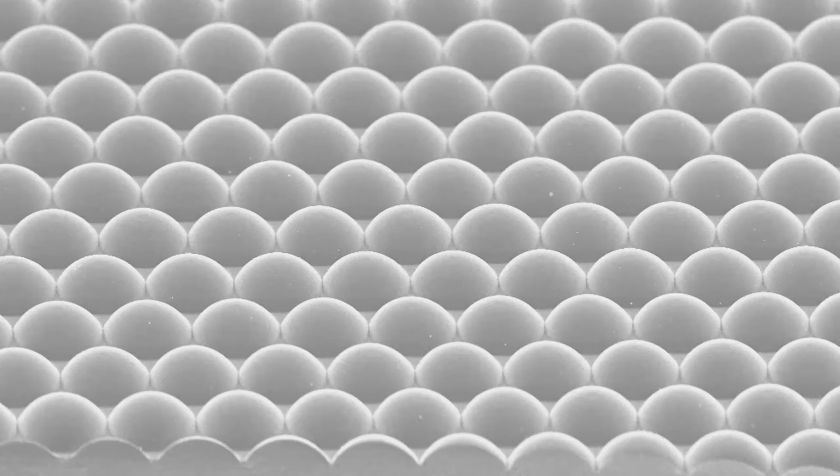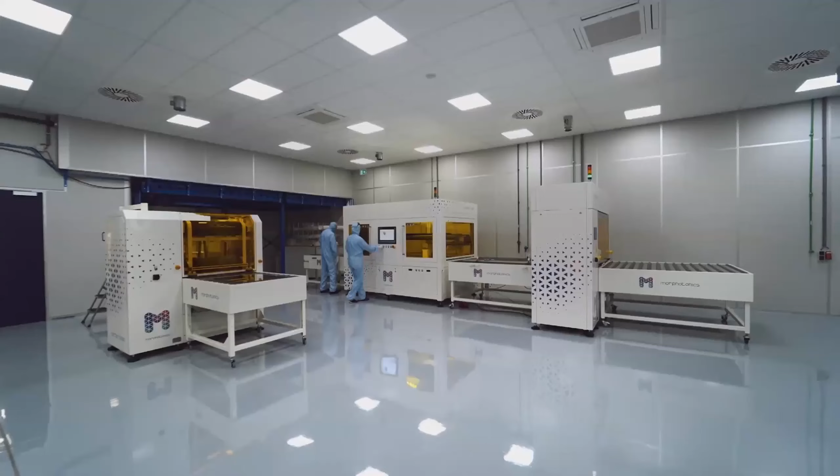The ability to create optical shapes in any form you want, completely miniaturized for perfect integration. Opening up new opportunities for security and branding, optical communications, consumer electronics, and more. And now imagine that this can be done with equal or even better specifications than conventional systems, and at lower costs. This is why PHABULOuS has opened up the one-stop shop in freeform micro-optics, making this technology now easily accessible to everyone who wants to implement it, providing a full supply chain of world-class freeform micro-optics specialists.

We can take you from design to prototyping and into pilot production for the full product life cycle, including design, modeling, origination, tooling, and manufacturing services. Some have already paved the way by integrating freeform micro-optics into their product portfolio. Are you ready to take the next step in your product development? Make it fabulous, and contact the one-stop shop for freeform micro-optics at info@fabulous.eu. We are fabulous.

Good afternoon, everyone. I'm Jeremy Picot-Clement, Technology Manager at EPIC, and I'm really pleased to moderate this fabulous workshop today on freeform micro-optics for lighting application. We'll talk and learn about freeform micro-optics technologies through highly relevant speakers today, in two different sessions: the first focuses on design and fabrication, and the second will be on application.

The aim of this workshop is for you as participants to get the maximum information on PHABULOuS, the European pilot line for the manufacturing of freeform micro-optical components, and also get answers. That's why I warmly invite you to ask any question you have after each presentation. We also have Jessica Van Eck, Managing Director of PHABULOuS among us, so she will be pleased to provide you all the details you need regarding the PHABULOuS project.

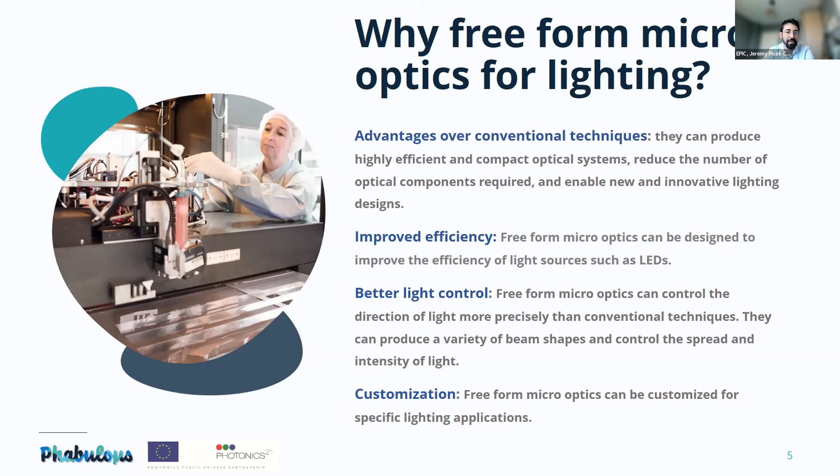It provides better light control by giving the possibility to control the direction of light more precisely than conventional techniques. They can produce a variety of beam shapes and control the spread and intensity of light. Last but not least, customization: freeform micro-optics can be customized for specific lighting applications. This customization is important since it's one of the strengths of European competitiveness in an industrial world where mass manufacturing is dominated by Asia.

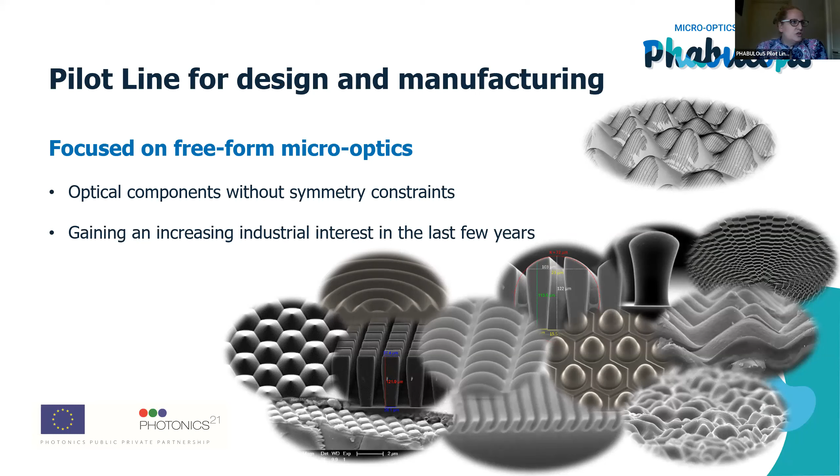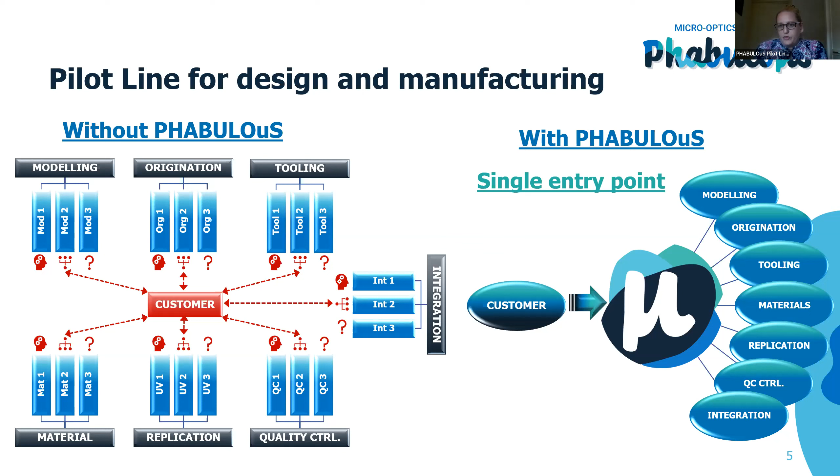We have one NDA covering all these members, and we make one single contract for all the services. So with this, we have all these different services that we can offer. As I mentioned, we have some special design tools also developed within PHABULOuS, really aimed at design for manufacturing, so that we know any design or prototype we make can be produced in large volumes.

We have, I think, at least 7 or 8 origination technologies available. We have partners that can do the tooling, making the tools for the replication. We have partners that can do all material tweaking, and we have a lot of metrology inside PHABULOuS, all aimed at the replication and the integration.

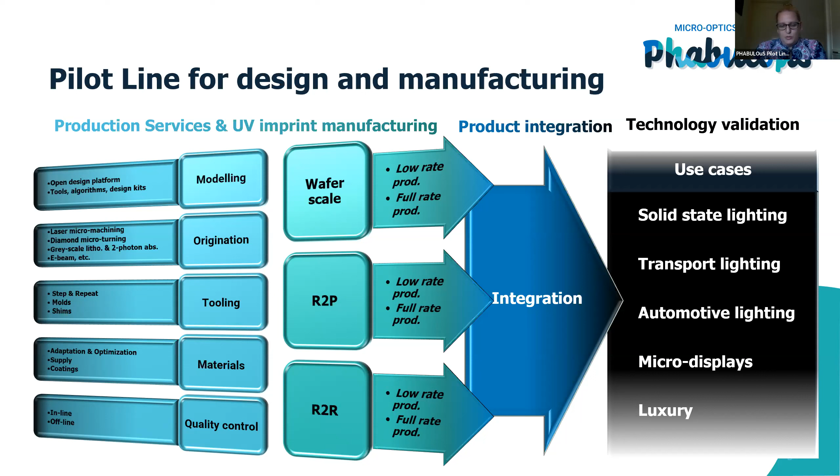We started the project already with a few companies looking to implement freeform micro-optics. You see here the use cases: solid state lighting, transportation lighting, automotive lighting, micro displays and luxury. I'll take you through them really, really short, because some of them you will also be hearing from today. For solid state lighting, we've been working with Zumtobel.

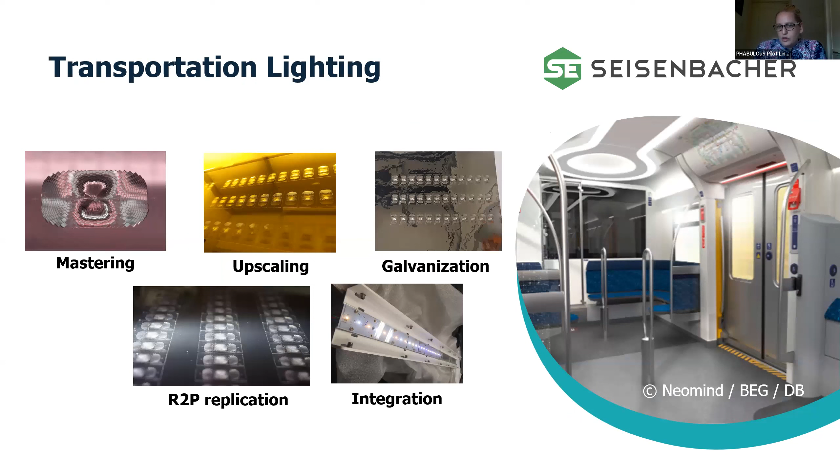You can see here a little bit of the mastering application. For transport lighting, we have been working with Seisenbacher, and you see here different phases that we have been able to do within PHABULOuS. With Hella, we've been working on automotive lighting applications, and you see here some of the things we've done.

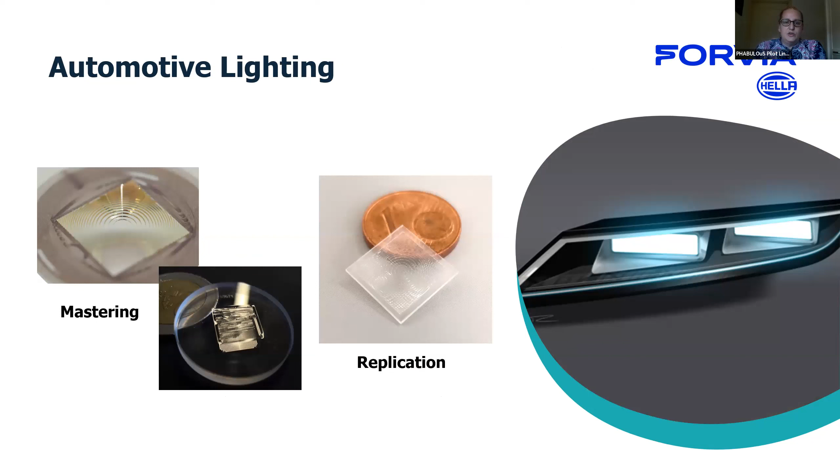And you see here a nice light box using a freeform micro-optical structure. And on the left top, you see also this tool that we've made to create these kinds of structures. So all of this is something that we've already done. But of course, this is just one little glimpse of all the possible applications for freeform micro-optics.

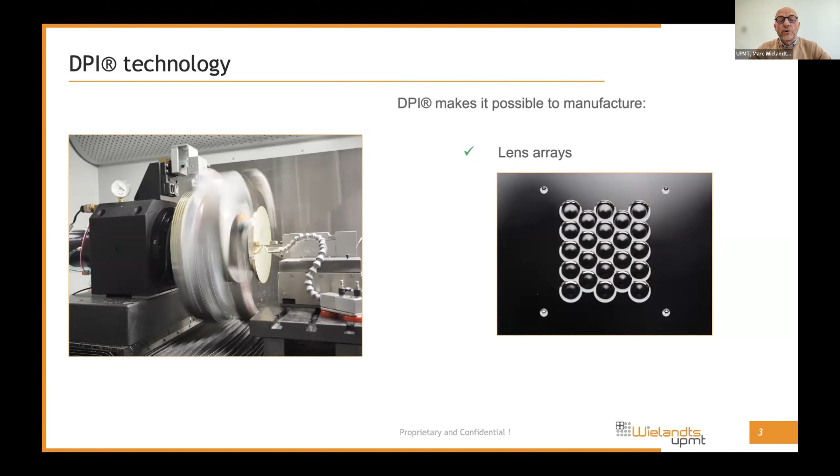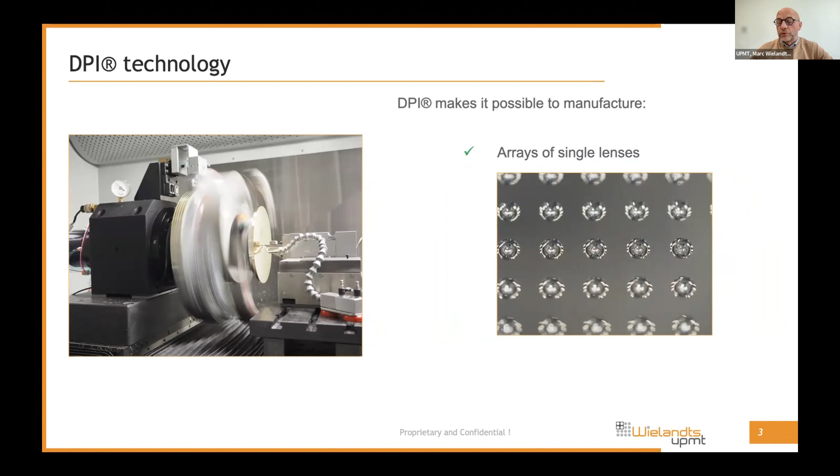Of course, we cannot only make lens arrays, but also arrays of single lenses, which is also a nice feature for mass production of such lenses.

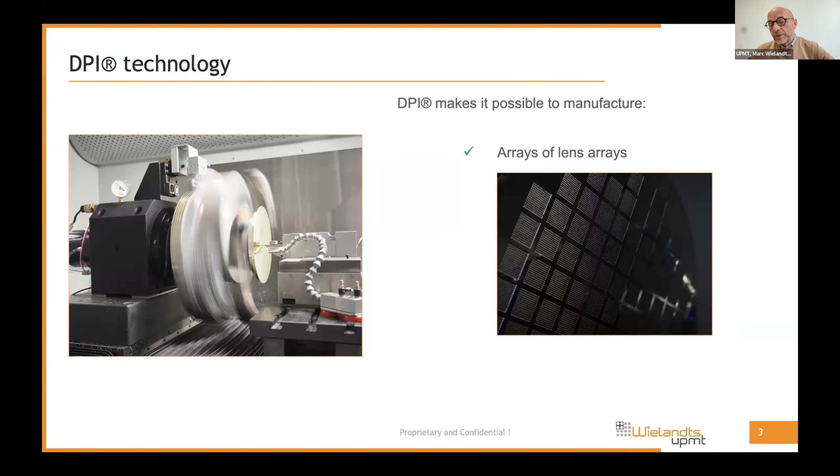Finally, what we do is provide 8-inch masters that are fully populated. In this image, you see a number of MLA structures machined with this technology. There are about 10 or 20,000 lenses on this master, and you will see a little bit of the accuracy of this.

The capability of this is to machine any surface that can be machined by turning, any lens surface, as an array. I'm not going into all the details here, but you have accuracies similar to what you can have in camera systems.

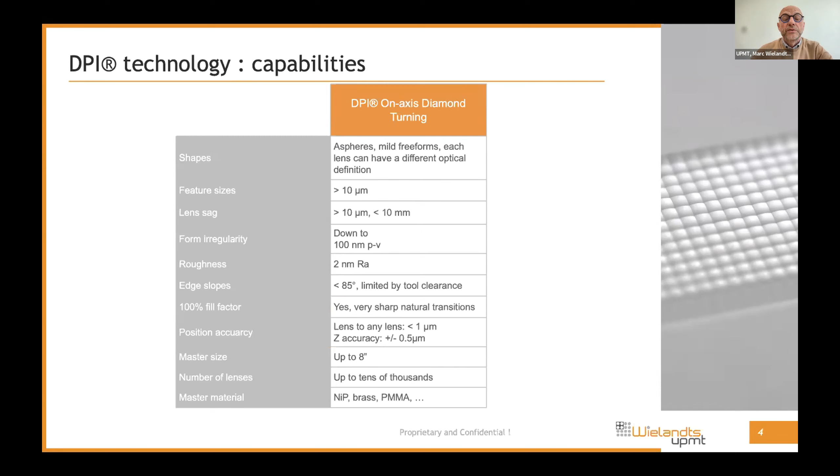What are the applications? Lighting, of course, consumer electronics, automotive lighting, and one of the examples that is given very often is the BMW carpet.

Healthcare, small lenses here can be produced in mass with this technology. AR, VR, automotive headlights - all these processes typically use these kinds of masters.

As an example, you see here a free-form surface of an MLA where all the lenses are different. This was for a VR application, and you see that the form irregularity of every surface can be 300 nanometers PV, so very low, with very low roughness. I think it's the only technology to do that.

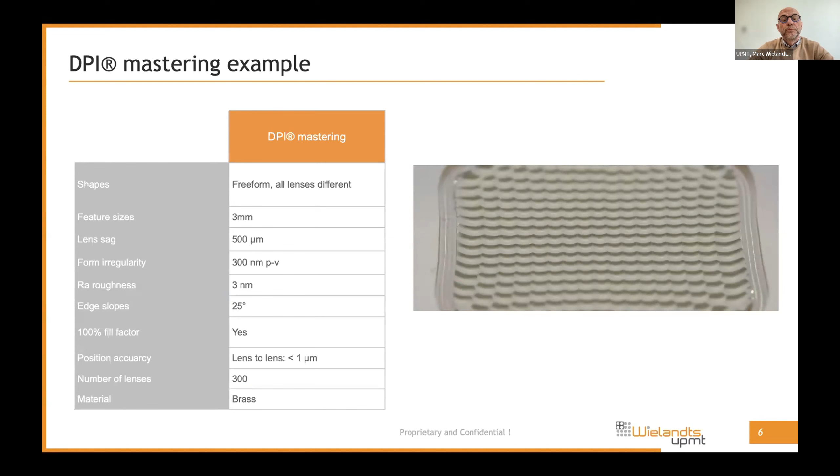Again, the image of the complete populated master of 200 millimeter.

We have been developing this technology to, let's say, the complete accuracy requirements that our customers ask, which are not only for a lens, but also for the array, also related to the position accuracy. They want that every lens on an 8-inch master is positioned at sub-micron accuracy, which with this technology can be done. So lens-to-lens accuracies below a micron on this surface can be achieved.

So we think this is now a ready technology for mass production, which allows us, in a deterministic way, to rapidly produce such masters in a very efficient way.

So we are waiting, of course, for challenging designs that we can do - freeforms, why not, non-freeforms also are welcome. I think that I have consumed almost all my time.

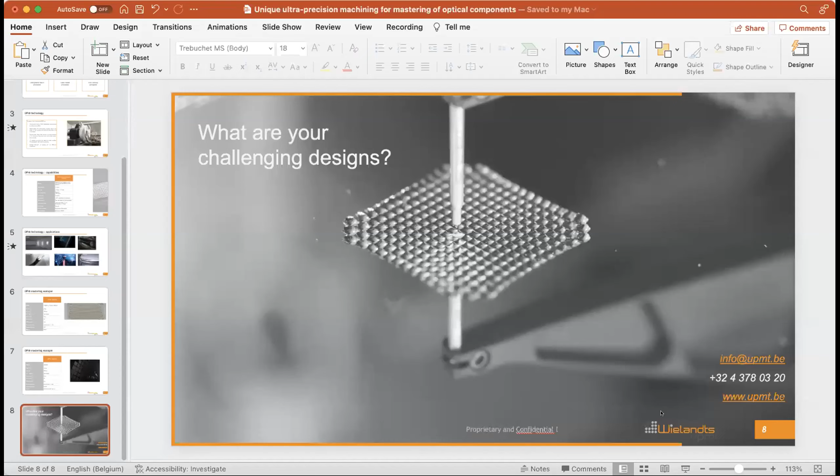I mean, okay, I tried to do that. Are you still seeing me, or? Yes. No, I mean, now you do that again. Probably, I don't know why. Okay. So you want me to go back to? Well, I'm just, yes, please. Could you please re-explain the principle and what differs in this technique from the other two techniques that you explained previously?

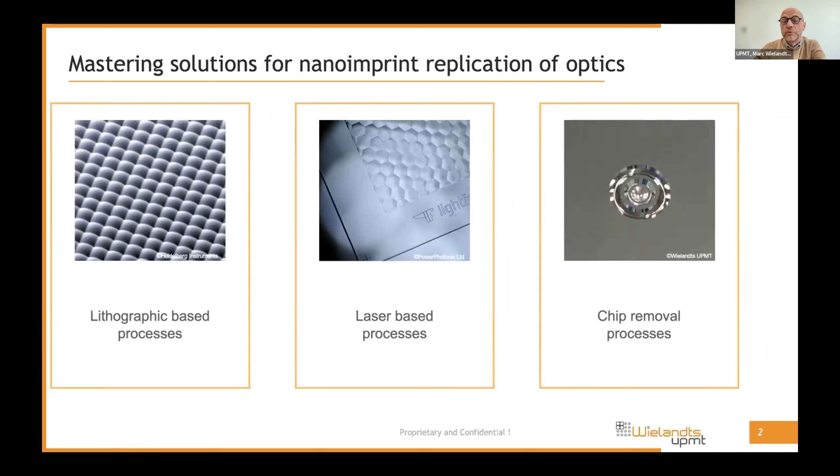Okay, so let's say, first of all, as I mentioned here, on the right side, we have a chip removal process by cutting, using a conventional tool for cutting. Only this tool is a diamond tool, to obtain the best possible roughness. So I suppose you are aware of that. Yes. So in a diamond process, mostly you would do turning, because this gives you the best surface.

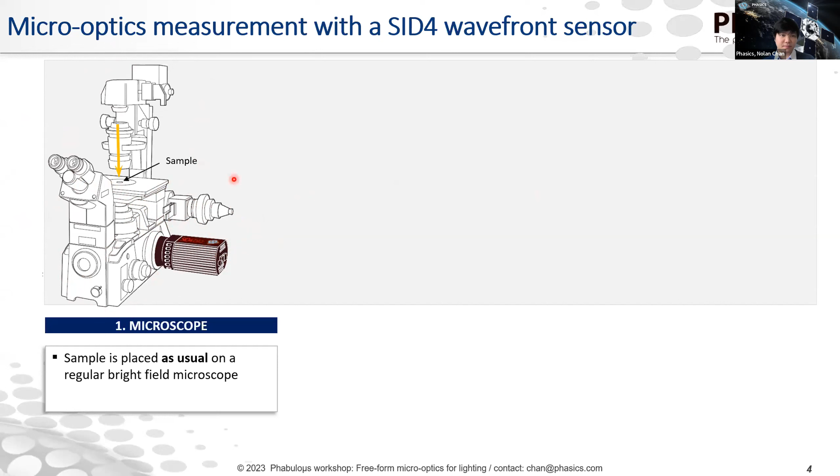When we replace the regular scientific camera or regular camera with a wavefront sensor, the light first goes through the first layer in our device, which is a diffractive optical element that we call a modified Hartmann mask, which is a 2D phase grating.

This 2D phase grating will diffract the light and create 4 replicas of the beam. These 4 replicas then arrive on the sensor chip, which can be of different technologies, like CCD, CMOS, or InGaAs, or whatever.

On the image, what we get is typically what we call an interferogram, which is a 2D sine function-like pattern that is locally periodic or slightly deformed in periodicity. What we analyze is this frequency modulation on the interferogram to retrieve the intensity and phase information.

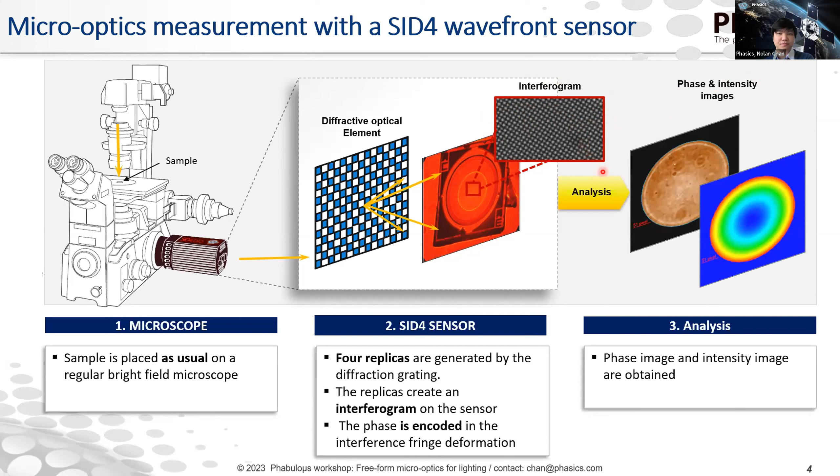We do this for two particular reasons. One is that we can use this solution for any wavelength that is compatible with the microscope. We have a technology that can work with the whole spectrum band of a given sensor technology, typically in CMOS, 400 to 1.1 micron.

It is not sensitive to polarization, so you can also perform a measurement that gives you a phase signature or a phase function as a function of polarization, which can be particularly useful for plastic optics.

It's easy to set up, of course. This is also a way that can be easily integrated for mass production tests, on production lines, because you always work with 2D images at once.

As I mentioned, what we measure is a wavefront, in particular the optical path difference, which can be expressed as a difference of index of refraction times the thickness of the substrate or sample that the light is going through.

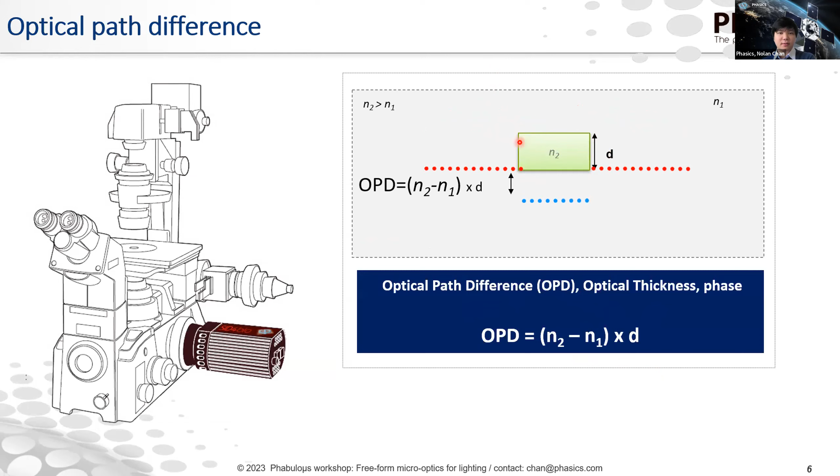From this, we want to achieve a really nice nanometric resolution. The first problem is that when you work with a regular microscope, you work with the aberrations of the whole set of optics on the beam path, so you have this set of aberrations.

Within this set of aberrations, you have the ones that are coming exclusively from the measurement method, so from the microscope in this case. What we do is subtract all the aberrations coming from the microscope itself.

In the end, you have noise if you look at an area where there's no optics to check or samples to look at. But when you go back to the area where you want to make the measurement, this subtraction allows you to get a really nanometric resolution on the actual measurement you want to perform.

We measure the OPD, which is made of these two contributors: the difference of index of refraction and also the thickness.

To give you an idea of orders of magnitude, we can achieve 10 to the minus 5 in terms of refractive index difference resolution. This is more to explain how the system works and how we can easily implement the wavefront sensor on a commercially available microscope.

Then, for example, if I want to use it on a microlens array displayed here, in this case I have a microlens array of microlenses with f/1, 250 microns focal length, and they work at 1050 nanometers.

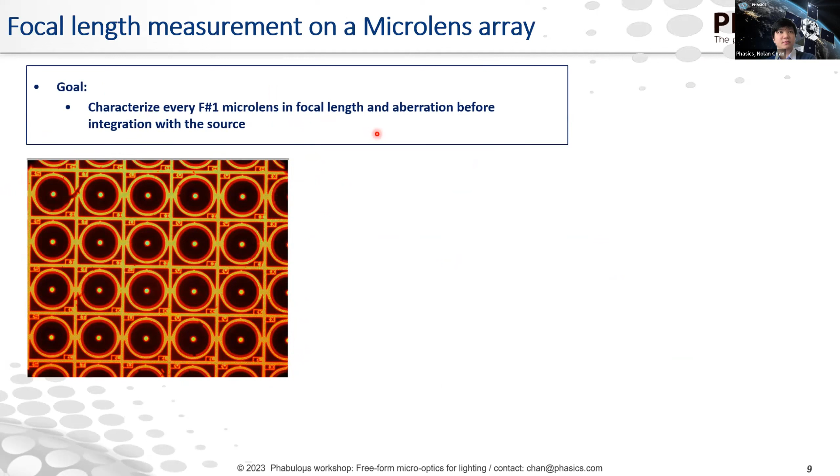How it works is that we take this full image with the different microlenses, we extract the information for one particular sample, and on this one we perform an analysis to obtain, for each one of them, the intensity and the phase map.

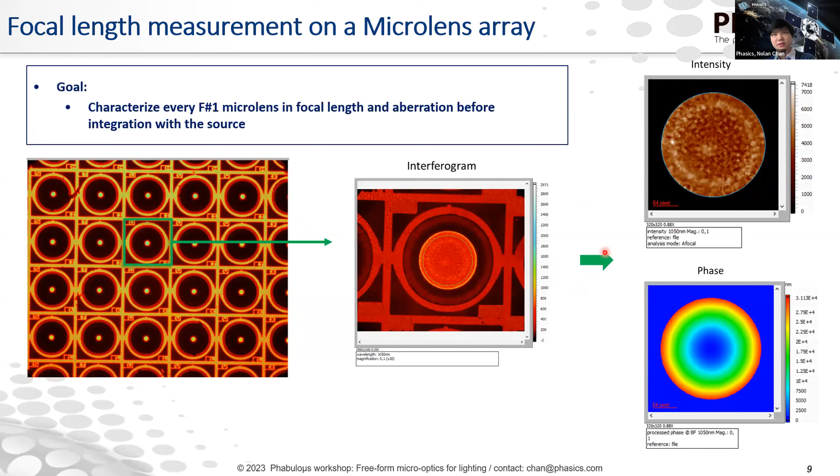So in this particular case, we will focus rather on the phase information in order to retrieve at first the focal length. To do that, we take the full phase information and decompose it along the Zernike polynomials, which enables us to isolate the focusing function of the microlens. We use the polynomial that we call defocus, from which we can derive the radius of curvature of the wavefront.

In this case, in the way we implement it, this wavefront curvature is equal to the focal length. We make this measurement a couple of times in order to have an idea of the repeatability. When we do a repeatability measurement, we try to remove and replace the system, and from that we obtain a standard deviation of about 1 micron for a value of 215 microns.

On top of that, we can also push the Zernike filtering analysis a little further and isolate what we call low frequencies—in this case, the Zernike polynomials up to the 7th order—and the higher frequencies, which are typically the rest. From that, on top of having the simple information of the focal length of every single microlens, we can go deeper and understand if there's astigmatism, if there's spherical aberration, if it is intended, and how it compares to the design.

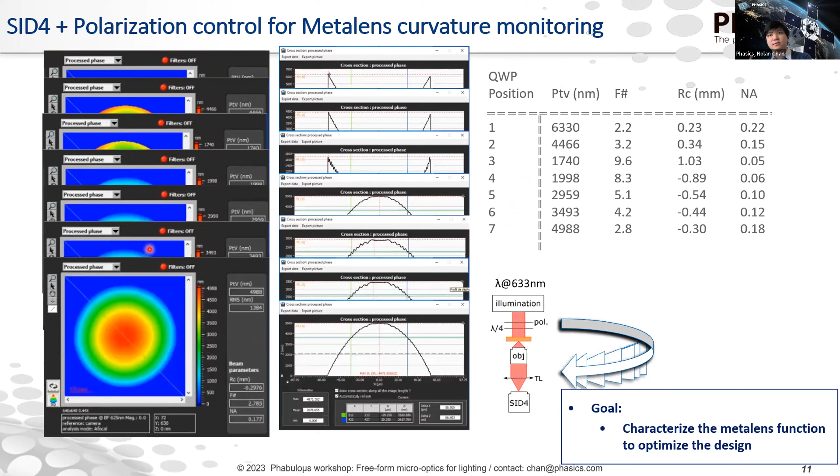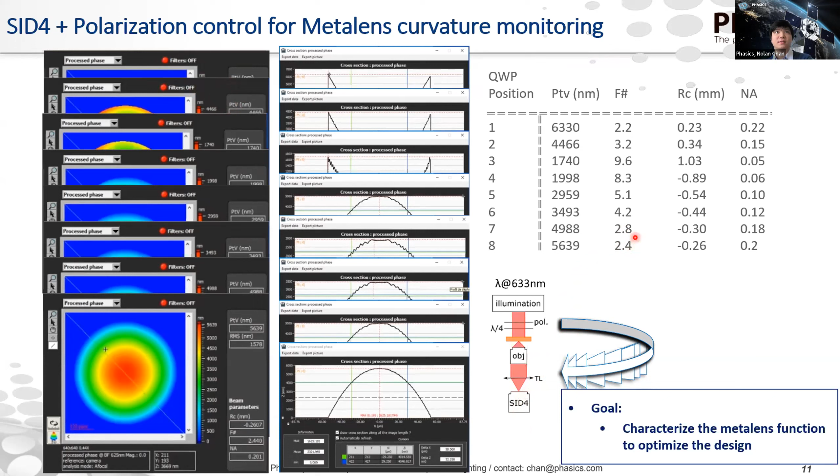This enables us to obtain a varying phase function, and once again have an idea of how the phase function evolves with the polarization and compare it to the design, to optimize either the manufacturing process or the design directly. Here we can see that I start with a focusing metalens and make it commute or change into a diverging metalens. This is all possible because the wavefront sensor is not polarization sensitive, so I can choose freely how I want to perform the analysis.

So the idea is really to show how the wavefront sensor can be used in different kinds of applications for testing micro optics. You can either consider the optical function, as I did, or consider them as lenses and check their focal length. We can also have access directly to refractive index and check the refractive index evolution for different polarization. It is implemented quite directly on any regular microscope, which gives you access to a really good resolution, and something that can be easily done.

And this doesn't require any particular complex optical system, so this can be done as a prototyping tool, or to understand or to troubleshoot any prototypes.

I'm glad to show these different examples for refractive index mapping or different kinds of waveguide characterization, which can also be useful in micro optics. So I guess that would be it for my presentation, and if you have any question, I'd be glad to answer them.

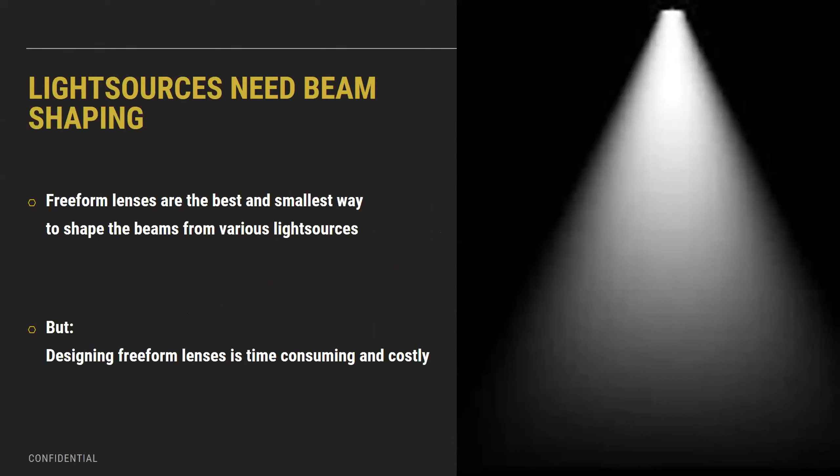Next slide please. So we have a solution for freeform microlenses, which is in-house developed, not something you've seen anywhere else. We have an in-house developed methodology and toolset focused on calculation of freeform lenses on axis and off axis, in any size, including freeform lenses even if there are multiple in a row. It's in-house developed, completely different, and we are connecting to production partners to ease the production.

So what we finally do is fabricate a working stamp for the step and repeat upscaling process. In this case, we had a grayscale litho master that we molded into nickel. And from that, we did a UV imprint on quartz to fabricate a step and repeat working stamp.

In this case, most effort in the upscaling was done on optimizing a reproducible filling process of the pattern that contains different step heights, which can be seen here with quite an angle variation. The lens had a maximum height of 50 micron.

So finally, we could well produce these 12 lens stripes as a resin on foil polymer shim. That's what's coming out of our step and repeat upscaling, which at the end was converted to a nickel shim by CSEM for roll-to-plate replication.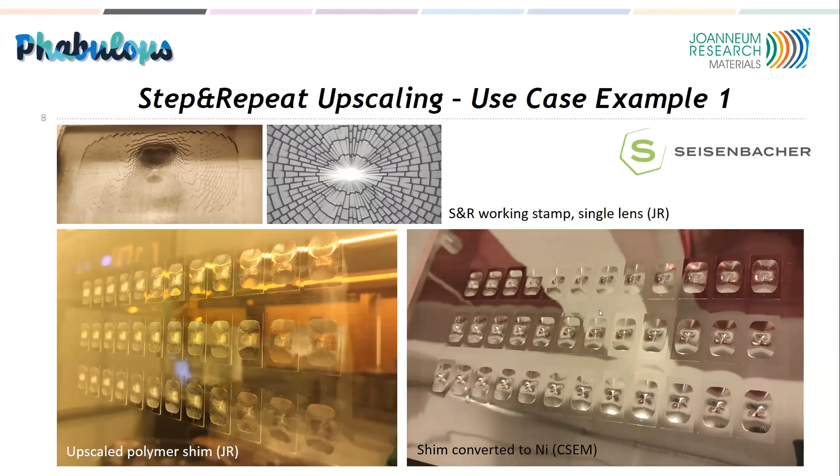We did an independent distance measurement and ended up with distance deviation values between 3 and 5 micron, and an average value over all lenses of about 4 micron over our whole active area of 300 by 300 millimeters. This is more or less representing our stage positioning accuracy without using our alignment system. And with that, we have been well within the specs for this use case.

Another upscaling with totally different requirements was done for Swarovski. As we know, they focus on sparkling crystals for decoration, luxury, and lighting applications. Within PHABULOuS, we developed freeform micro-optics to create sparkling areas, not by using real crystals, but by an imprintable pattern.

Creating a large area sparkling foil was the main target of this use case. The pattern was simulated and designed by Swarovski, and we finally ended up with randomized facet structures with a maximum height of 200 micron.

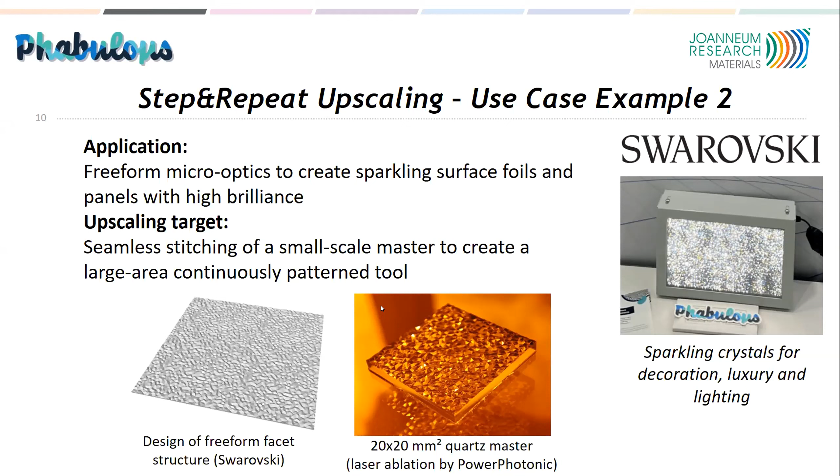That could be originated via laser ablation in quartz by our pilot line partner PowerPhotonic. And they managed to create the master in a way that the patterns ending on the right side were exactly continued from this point on the opposite side, because here we targeted for a real seamless area upscaling from this 20 by 20 millimeter master to a final area of 140 by 260.

You can see that already here. We have 4 step and repeat imprints positioned with a nominal distance of 500 micron.

We see an image from the optical microscope of two imprint edges with the gap, and we can immediately see that the patterns continue from left to right, fitting very well. After imprint optimization for this very high pattern, which requires a good definition of the imprint edges, our task was to minimize the distance.

You can see here already 4 imprinted fields, 2 times 2 fields with 0 distance, shown in different angles and illumination. Even by the naked eye, which is very sensitive to straight lines that disturb a pattern, we can hardly see the stitch lines. On the right here is a macro photo giving an idea about the stitch quality, showing one stitch and the continuation of the facets from left to right.

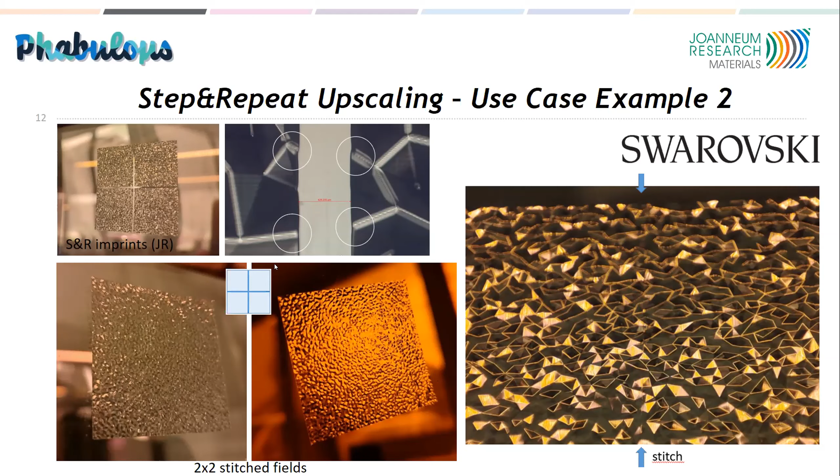And this was finally the result. We fabricated 13 times 7 fields, seamlessly imprinted onto a flexible substrate foil, reaching the required field size for this use case. Again, this polymer shim was galvanized by CSEM, and the pattern was then roll-to-roll imprinted, in this case, into a resin with high refractive index and dispersion to result in a sparkling crystal-like appearance.

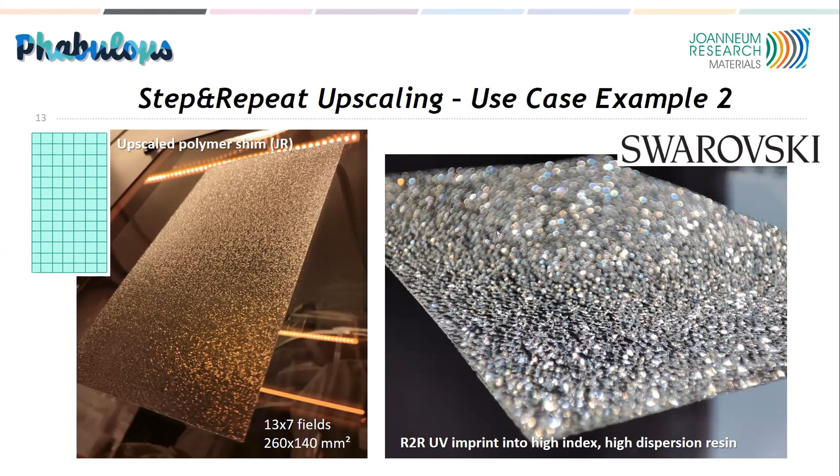The last use case I would like to show is the application of Zumtobel. They go for innovative indoor lighting solutions and targeted a wall wash application, so freeform micro-optics that produce a homogeneous light distribution on a wall when placed over a spotlight. The pattern was designed by Zumtobel, and again it was clear here that originators will not be able to directly fabricate the whole requested area of 200 by 200 millimeters in this case.

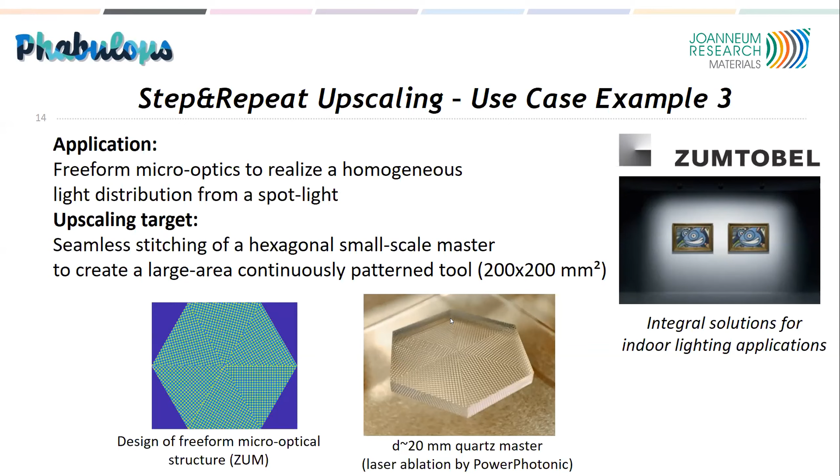With a view on seamless upscaling already during the design phase, we decided to go for a hexagon-shaped master, with the idea of having not too sharp corner angles, supporting this special type of structure with seam lines that are as invisible as possible. The master was again originated via laser ablation by PowerPhotonic.

You can see here first single step and repeat imprints, with the nominal distance first, and finally, after about 18 or 20 improvement cycles, the optimized seamlessly stitched structure on the right.

As a final result, we have here the 200 by 200 millimeter upscaled field, resin on foil. Working with the hexagonal master was new to us; it needed some basic changes in our grid design, but we saw that this approach can be really beneficial for the stitching result, especially if the type and design of the pattern allow for this strategy.

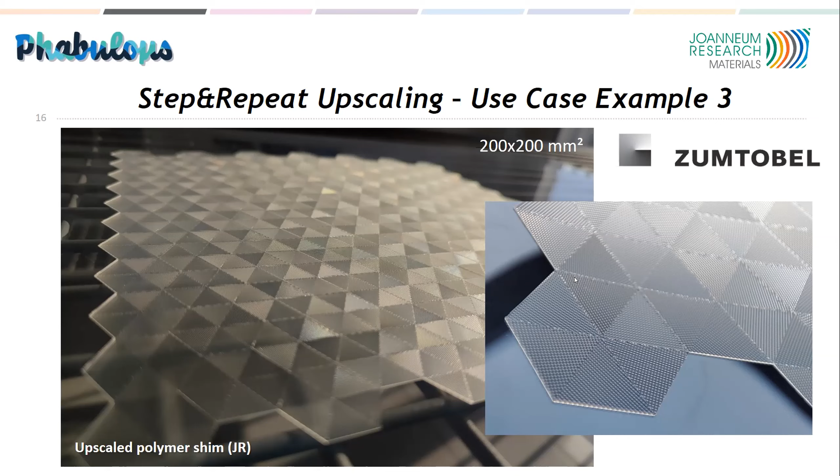To summarize, we offer the upscaling of micro and nanostructures to fabricate large and flexible polymer type shims. These polymer shims are stable in subsequent galvanization processes. Therefore, we target all roll-to-plate and roll-to-roll type replication or production processes.

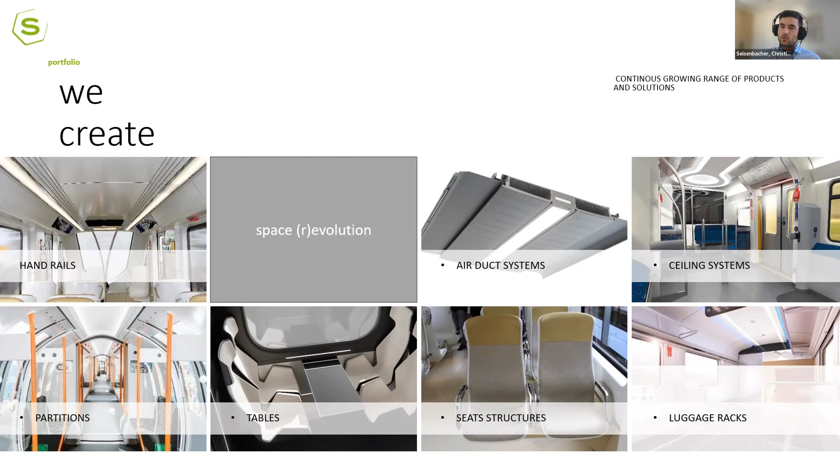But ceiling systems are for sure our core competence. By the way, micro-optics is something we were not in touch with before PHABULOuS, which makes us kind of unique as a use case member within PHABULOuS. What I want to say is that you don't have to be an expert in micro-optics to realize a project with PHABULOuS.

This slide is just to show you one reference project from many others of ours. I thought since PHABULOuS is an EU-funded project, I'd show you the new tram in Brussels. For the trams in Brussels, we delivered a ceiling system with integrated lighting, air ducts, and air diffusers. So if you ride the new trams in the future, you can say, I know the company which did that beautiful ceiling, hopefully.

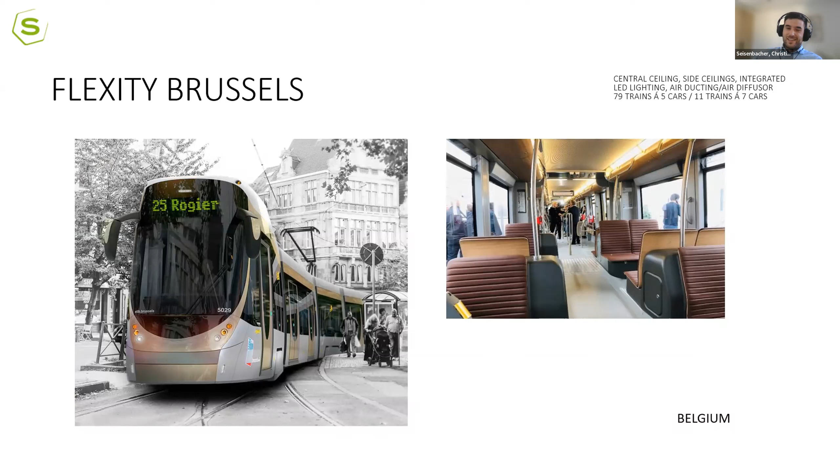Seisenbacher was chosen to be one of 6 use case partners in the pilot line. Within the Seisenbacher use case, our aim is to make a large area direct lit luminaire using freeform micro lens arrays to improve the luminance uniformity, a thinner form factor, and a reduced LED amount. The luminaire should be developed mainly for the railways market.

Somebody of you may wonder why we don't use edge-lit luminaires, since this technology would meet all these requirements and is already state of the art. The reason is that edge-lit technologies can't be used in railways applications, unfortunately, because of fire and safety standards and regulations, and the problem is the material of the light-guide plates. That's the reason why we try it with direct lit applications now. By the way, large area luminaires for railways seem to be quite trendy.

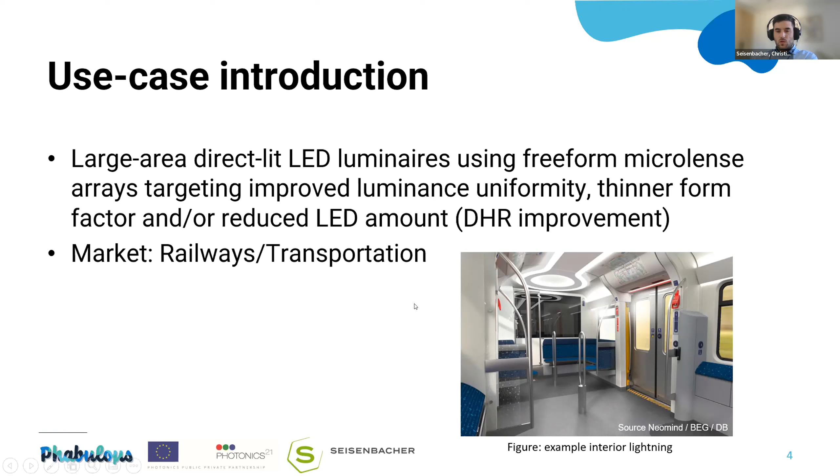A few words on the functional principle. As you can see in the picture on the right, there is an additional freeform microlens array layer, shown in blue here, and it's between the LEDs and the diffuser. Here are the LEDs and here is the diffuser.

Due to this, the emitted light coming from the LEDs gets redistributed so that the entry side of the diffuser is homogeneously illuminated. As a result, we should have no visible LED spots and a homogeneous appearance of the luminaire, while improving the distance to height ratio, also called DHR. The DHR is a ratio between the LED pitch, so the distance between the LEDs, and the height from LED to diffuser.

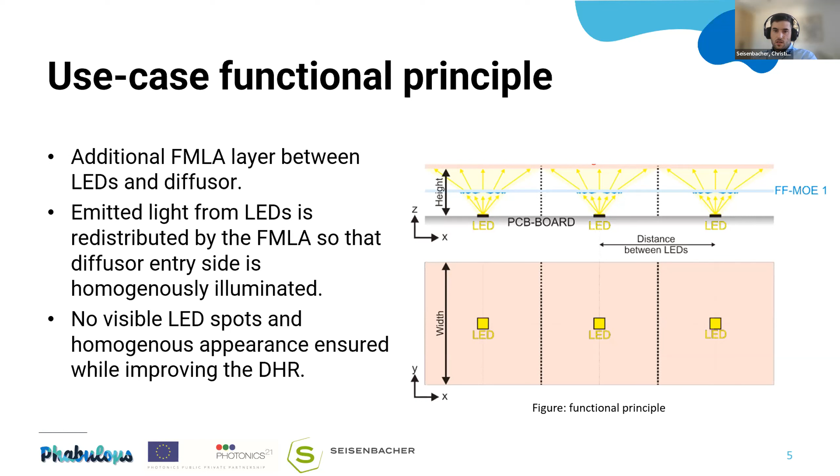So this is the idea and the concept behind it. We already have heard that the PHABULOuS pilot line offers services from the idea or the design until the fabrication of the micro lenses, and even integration. As I said at the beginning, Seisenbacher hadn't any experience with micro lenses before, so we really took advantage of nearly every service PHABULOuS offers.

Every service which is marked with these green boxes was used by us. We had the idea and the requirements for the application, but starting with the design, over mastering, upscaling, choosing lacquer materials, quality control of each step, roll to plate replication, and some minor parts of the integration were done by partners of the PHABULOuS pilot line. Seisenbacher itself was responsible for the electronics, the integration, and building of the demonstrators. Within the next slides, I want to show you some details about each step and progress.

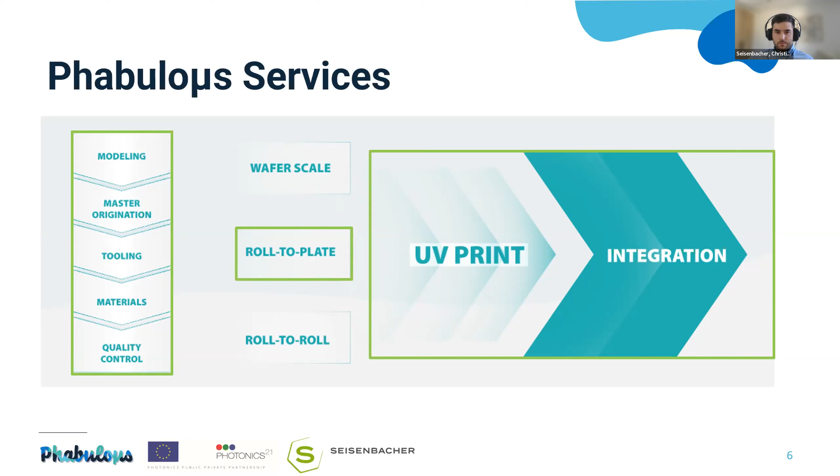Some words on the requirements. We decided that our luminaire design with integrated freeform microlens arrays should be based on a real project. You can also see a crosscut picture on the right, which is one of the two luminaires of the ceiling system, which can be seen below. We decided on it because it's a linear luminaire with a very broad diffuser, which is very common and also easier to realize for proof of concept.

The diffuser width was defined at 80 millimeters. The distance from LED to diffuser should be 27.2 millimeters.

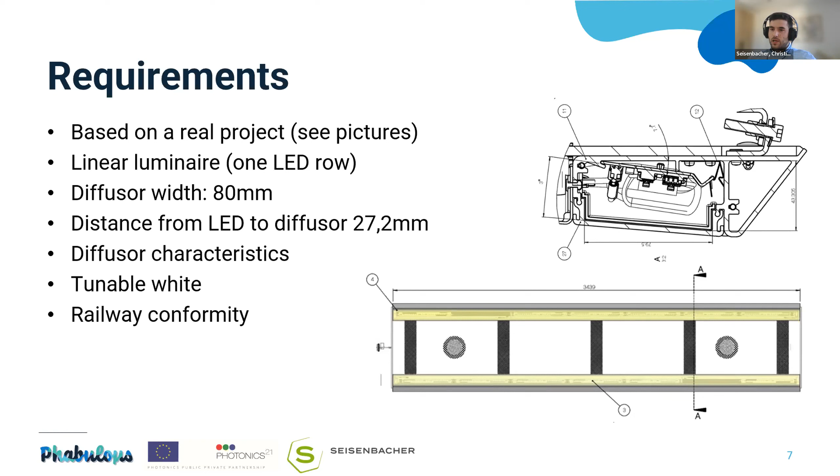The diffuser characteristics were defined exactly, for example transmission of light. The luminaire should be tunable white ready, which means color mixing of a warm and cold white LED should be possible. And of course, the luminaire must comply with all the relevant standards for railway applications.

In the next slides, you will see a lot of what you already have seen within the presentation from Ursula Palfinger.

The design of our lenses was done by Joanneum Research. They used an algorithm which generated a Fresnel-based lens, considering all requirements and desired LED distribution.

The LED pitch, which is the distance from one LED to another with the same color, was set to 40 millimeters. Considering a tunable white solution, the LED pitch is actually 20 millimeters, but with alternating LED color.

The generated microlens itself can be seen in the picture on the right. It is approximately 22 millimeters in length and 14 millimeters in width. The maximum feature height is 50 micrometers, so it's very flat, with the Fresnel-based design.

The distance from LED emitting surface to the microlens was set to 3.5 millimeters. At the two pictures at the bottom, you can see the difference of light intensities on the diffuser entry side between the luminaire of the real project without microlenses and the luminaire with the free-form microlens arrays integrated.

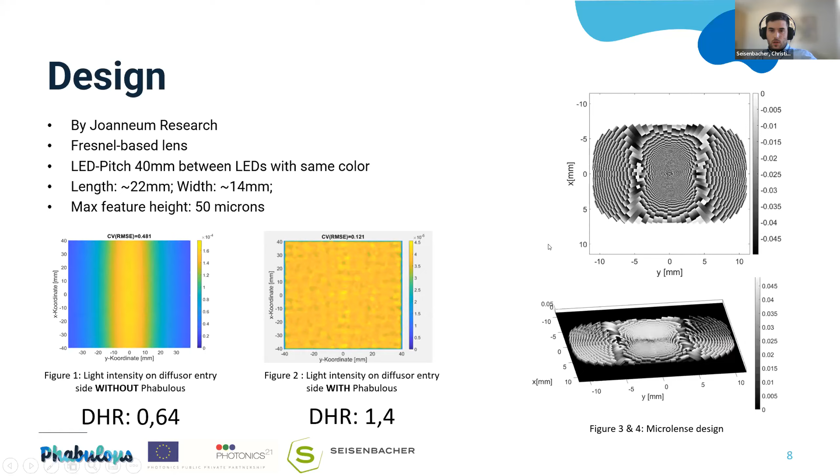Coming to the mastering and upscaling process, when the design is finished and the parameters are known, the pilot line decides which method out of their portfolio could be the best for your application.

After that, the master was galvanized and molded, resulting in a stamp used for step and repeat upscaling. With this process, our desired microlens pattern, consisting of 12 lenses in a row, was done with high accuracy in positioning. You already have heard it from Ursula Palfinger talking about plus minus 5 microns.

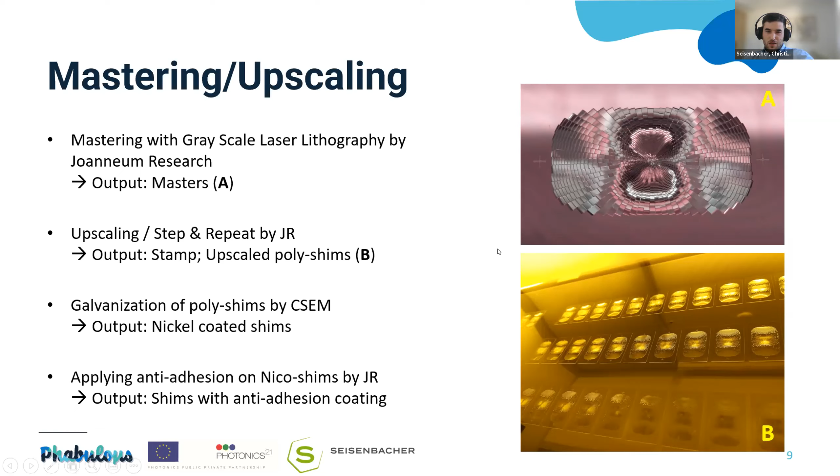So you see, a lot of steps have to be done, but we're not finished yet. To commence the roll-to-plate replication process, it is necessary to produce a flex stamp molded from the shims.

This stamp will serve as a tool to imprint the replicas in the roll-to-plate replication process, which will be carried out by Morphotonics for the Seisenbacher use case.

A 2 millimeter polycarbonate paste substrate will be utilized, on which a UV sensitive lacquer will be applied, and the lenses will be imprinted.

Coming to one of my last slides, we also have built 2 types of demonstrators within the Seisenbacher use case. We have built what we call laboratory prototypes, which are small scale prototypes for testing. They are 1 meter long, easily accessible and easy to handle. Furthermore, they fit much better into, for example, a temperature chamber or a shaker for shock and vibration tests.

Excuse me. And yeah, reflectors and lenses. And of course, we can also have lens arrays where each lens is a freeform lens, which we have also assembled in an irregular grid.

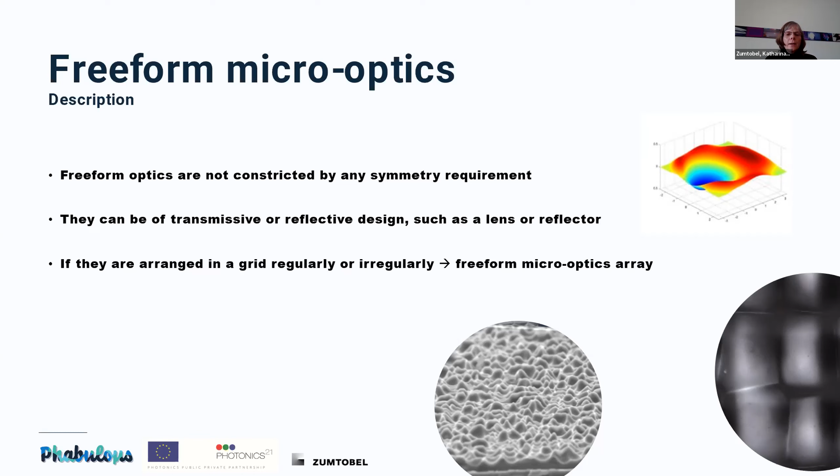By the way, the last thing we really did in Phabulous.

In imaging, which is partly the case in what we do also in illumination, there's one big advantage to using freeform optics, because you can reduce the number of elements you have to use. So you can connect the image forming and the aberration correction in one part.

This is very useful. In non-imaging optics, which is mainly used in illumination, you can achieve also very asymmetric light distribution, what we also have done inside Phabulous.

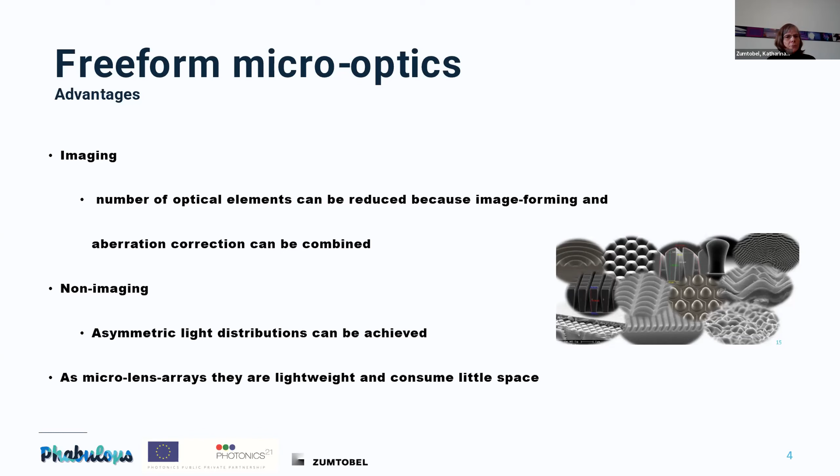And of course, if you go to micro optics, you always have very lightweight elements which consume very little space. These are the 2 big advantages of freeform micro optics for illumination.

So again, the overview of all the processes involved. Modeling and simulation probably will depend on the company you work with. Some have their own capabilities, some work with partners, but still freeform designing of really freeform optics is a very demanding task, also in illumination, where sometimes very demanding requirements exist concerning the target distribution.

Then comes the origination, what we heard a lot about, also from UPMT in the beginning of this session. Then the generation of the tool. This again could involve quite some steps, which we also heard before.

Then the replication with the different techniques, and in the end, the integration. It could be very demanding or it could be less demanding. What we have seen already with the use case of Seisenbacher, there the precision has to be very high.

So for modeling and simulation, usually you could start with ray mapping, to really see the flux distribution or illuminance or luminance distribution of your light source, which you have to map to your target area. This might be the first step.

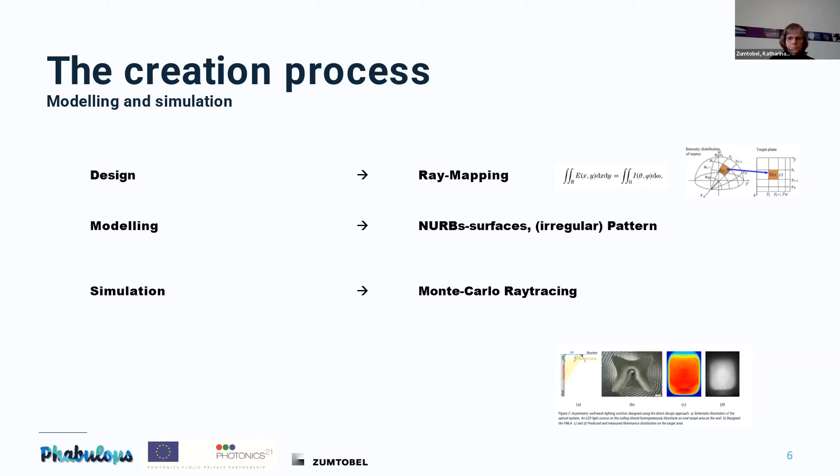Then we come to the origination. I'd like to repeat: we have diamond micromachining by UPMT, then laser micromachining, femtosecond laser ablation, grayscale laser lithography, and two-photon absorption.

And of course, as a use case partner, it's quite demanding to know what are the right techniques. And I think this is exactly what the pilot line is about, that if the user comes with a problem or with a task, more to say, to choose the correct technique.

And this is also what we learned in the last 3 years, that not all techniques really map to your requirements. Each of those techniques has its advantages and disadvantages.

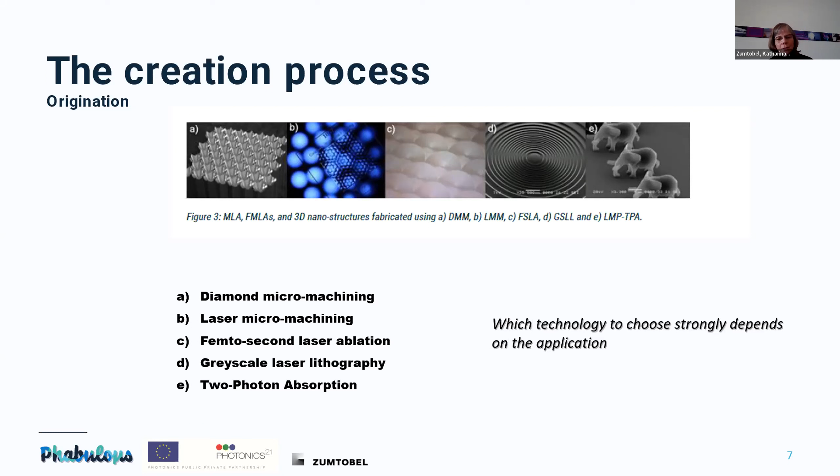For the replication, this is the same. Of course, you have some possibilities in wafer scale, which we used in our use case. This gives you very high precision and very high structures. But of course, it's not as industrialized as, for example, roll to roll. And roll to plate is also very interesting for illumination, because having a rigid part in many cases in luminaires is an advantage.

All of those, from what we learned, the replication is very good. So if you have any damages inside your master or inside your tool in the end, you will see it in the part as well. What might differ a little bit is maybe the shrinkage.

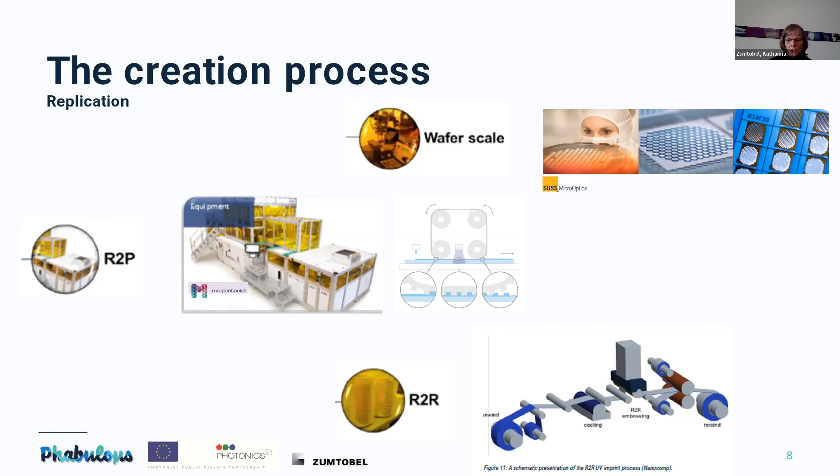And here we are already with the quality control, and this is still a really demanding task. Usually you would have to do the quality control after each step. But of course, if you have structures - that's why I was asking before about gradients and steep angles - this is still not really solved at all scales, I would say.

We have some equipment in our community, like laser scanning microscopy, SEM, white light interferometry, and profilometer, but still it's not that easy. And also to have really good data transfer, so that you have first your simulation, then the master, then maybe the tool generation, and so on, to really have a closed loop. What happened after each step is not really easy, so that's what you have to look for.

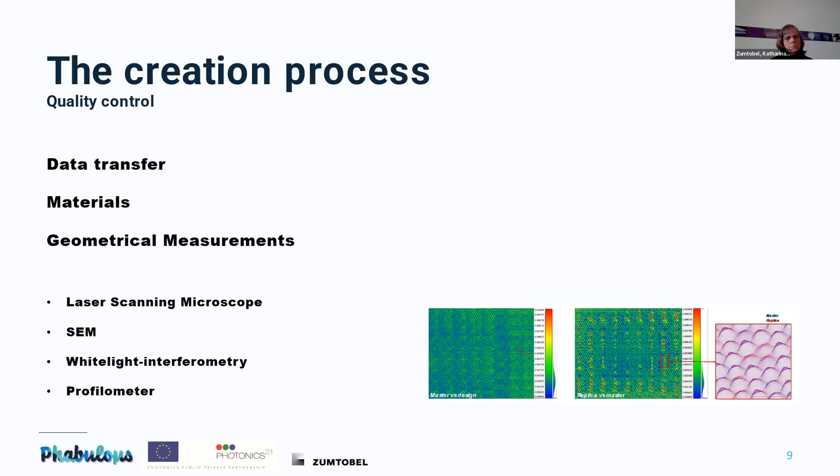Then materials—there was also quite some material testing going on. So materials which are very likely to use for imprinting, which are good there, might not be usable in more demanding applications. For example, illumination for transportation or automotive has quite high requirements, and in illumination we're sometimes in very harsh environments, so this has to be tested. And geometrical measurements, that's what I already mentioned.

Other challenges we see in general lighting: of course we have large sizes, so we need—not like in head-up displays or other applications, even in automotive where the size is not so big—in illumination we need a large size. Then we have long lifetime requirements, so the materials have to be very good. And in contrast to other applications, illumination is very cost sensitive. The combination of large sizes and cost is quite difficult.

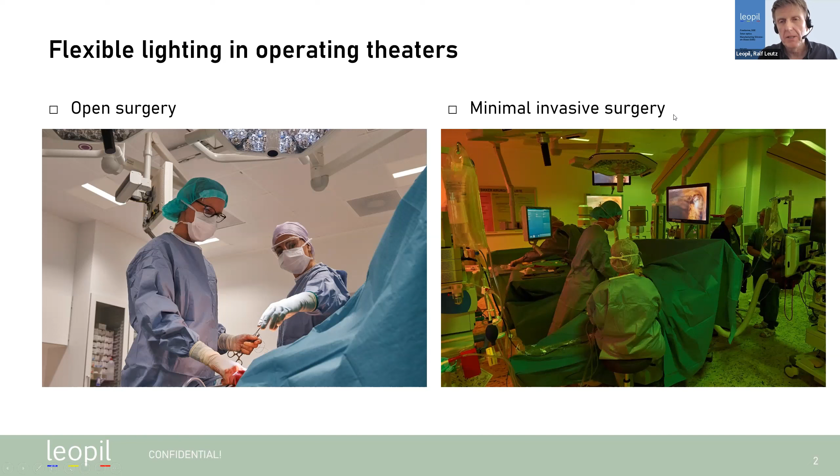There are two operating theater scenarios in principle. Most of us know operating theaters from the receiving end. Often it's open surgery, dominated by high brightness and squads of people working. More recently there's minimal invasive surgery, where the lighting scenario is very different. In open surgery, norms tell us what to do, how bright to be, and also what brightness not to exceed, which is the interesting part. For example, you want some light on the walls but not too much, and you want to avoid glare, which is a very important factor.

In minimal invasive surgery, this standard does not apply, and the illuminance is 15 times less. People there are concentrating on the task at hand, looking at screens, not even at the body.

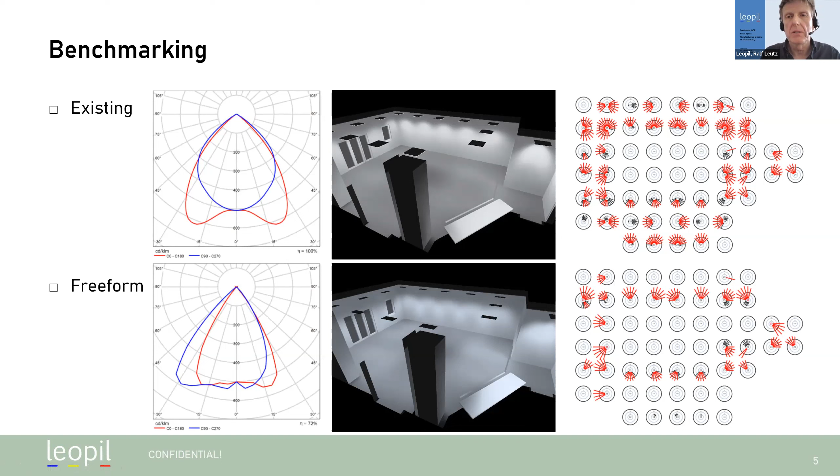We also want the colors to be present. So now comes the array thing everybody talked about, you need to replicate and put things together. We want to do that so the colors, which only need the 100 lux, whereas the whole thing needs 1500, can be flexible and operated within one luminaire. We again have a hexagonal way to stitch these lens elements together, and we have different colors that allow this flexibility for the operator.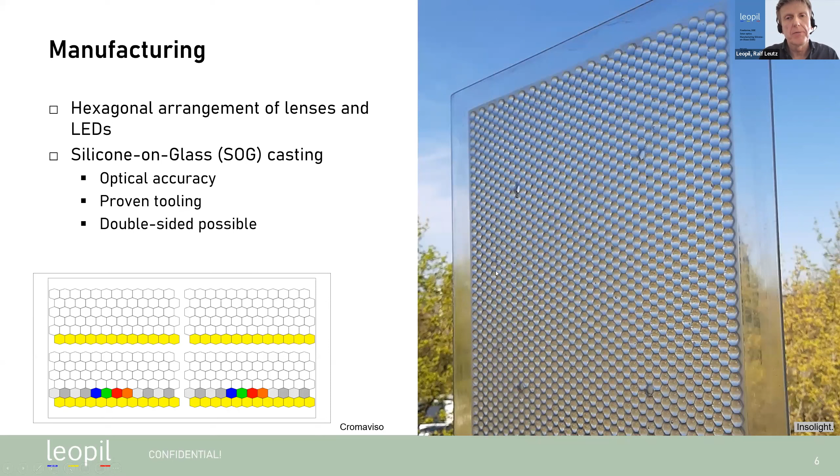Thanks very much. One note on what Katharina said: we had a recent automotive project where we did diffractive optical elements also on glass, and there the tolerances became the problem. It's not really so much the surface, but there's always some stray light, and it may appear a little weird when you directly look at it, but usually in the far field distribution you don't see it. What you do see is when tolerances are overshot, and that's maybe the difference between the imaging and non-imaging case. But otherwise, it's pretty similar, I believe.

Thank you very much. Thank you, Ralf, for your interesting input. Any question for Ralf, please? By the way, did you already hear of a PHABULOuS Pilot Line, Ralf? Yeah, I was involved in the early stages. Okay, great.

Any question from the participants, please? Okay, Katharina, please, from the Zoom table. Just a quick one: if you have different LEDs with different colors involved, how do you deal in this project with colored shadows? Do you have any, or how do you do that? You call them color cross lighting, or what is it? Sorry, yeah, I mean if you use a lens array and you have different kinds of LEDs, do you get any colored shadows? So it can block light.